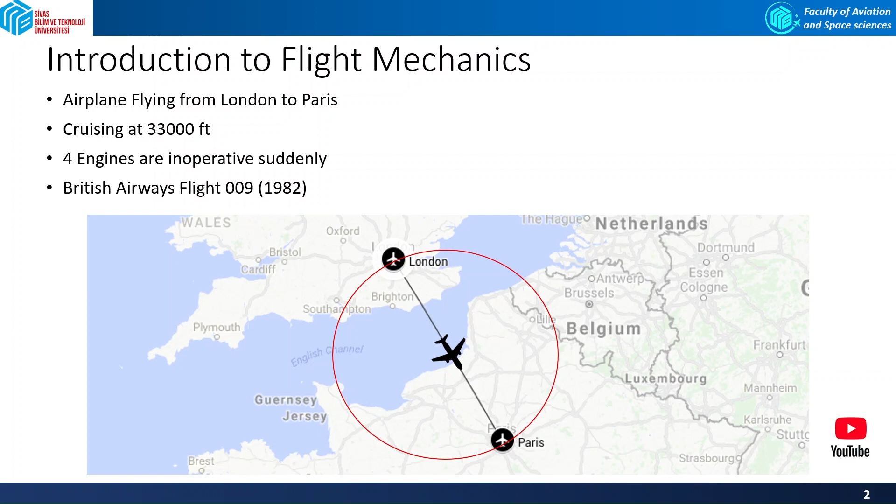Some other key questions that we can address in flight mechanics are, for example, how far can an aircraft fly with a given amount of fuel, or how long can an aircraft fly time-wise with a given amount of fuel, or what's the maximum altitude that can be achieved, or how fast can an aircraft fly, or sometimes how slow can the aircraft fly. So it's obvious that the answer to these and similar questions depends on many things, for example, the aerodynamic shape of the aircraft, the type of engines, the aircraft weight, or some other parameters.

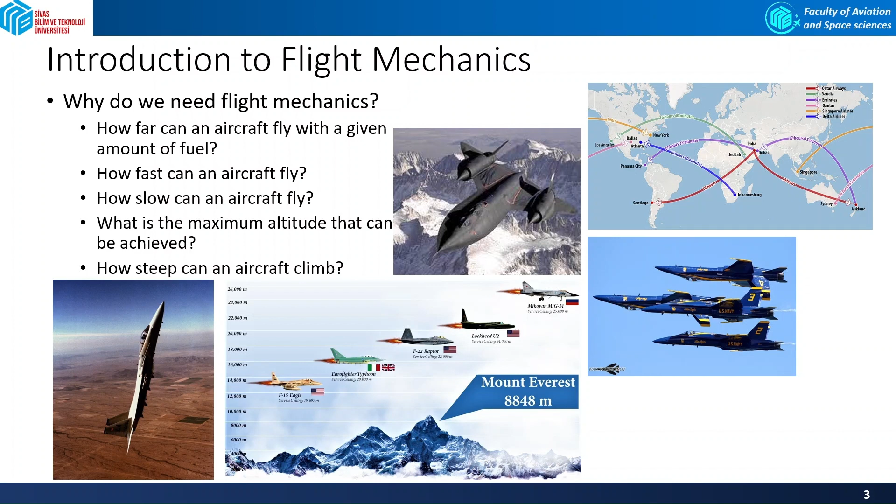So when you have the answers to these questions, you can start working on a very interesting topic, which is called aircraft morphology. Aircraft morphology means that if you want a certain performance from an aircraft, then what is the optimum shape of that aircraft. Here you can see the difference between a civil aircraft and a military aircraft. So morphology can answer this question. Because of the certain performance, the shape of the aircraft will change.

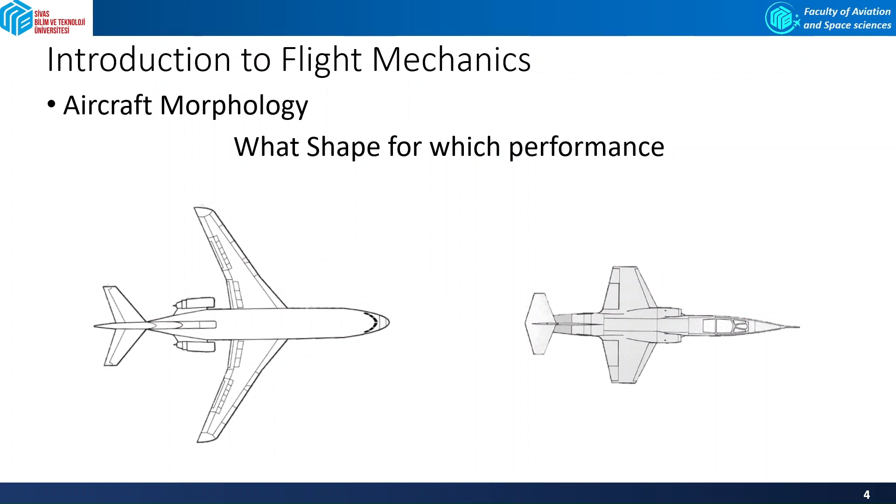Therefore, in flight mechanics, the performance of a complete aircraft is analyzed, and the question here is related to the motion of the aircraft. This means all information from the different disciplines that we just studied together, like aerodynamics, the structure, or in other words, the weight of the aircraft, the pilot, how he or she operates the aircraft, the propulsion system, and also the atmosphere, so the ambient. All the information will be gathered and given to flight mechanics.

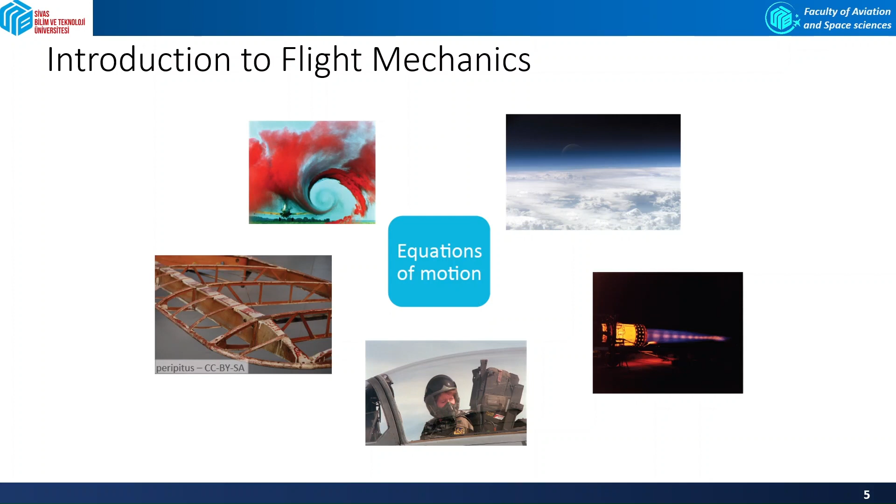So since we are interested in calculating and finding answers to those questions, like how fast or how far or how slow or how high an aircraft is able to fly, we should start by deriving the general equations of motion. So the first thing is Newton's first law, and it states that a body at rest remains at rest and a body in motion continues to move at constant velocity along a straight line unless an external force acts on it. This law, as we mentioned, only applies in an inertial frame of reference, or in other words, a frame of reference that does not accelerate.

So imagine that you are inside a train and the windows are closed and you cannot look outside. From your own point of view, everything inside the train is at rest. So this is weird. If there were a ball on the ground and the train suddenly had to brake, the ball, as you see here, starts to move forward. But there is no external force acting on the ball.

In fact, the ball just wants to continue moving forward, whereas the train is stopping. So similarly, if the train starts to turn, you can see that the ball can go left or right. Again, there is no external force that acts upon the ball, but because the train is experiencing an acceleration, the frame of reference is not an inertial frame of reference, and therefore Newton's first law does not apply to this system.

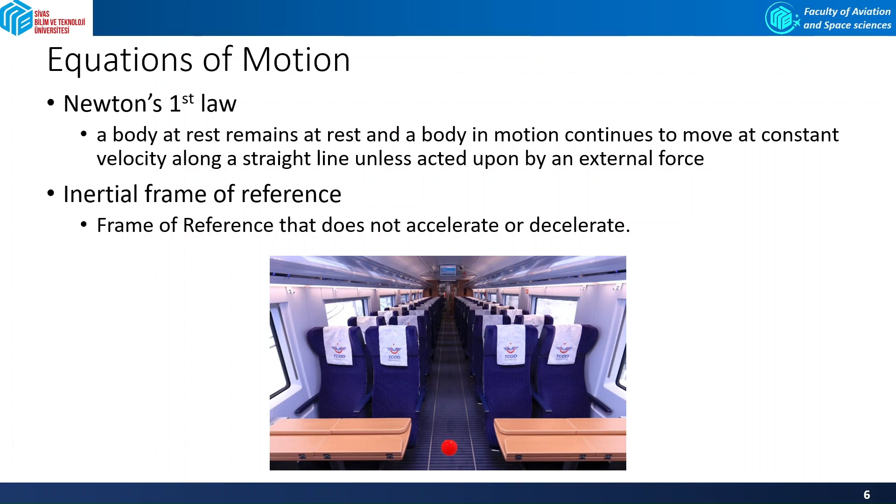This is important to realize when we derive the equations of motion for an aircraft. So we should clearly define the difference between frames of reference. So a starting point, which seems more logical to us, is the Earth surface. So we can define a reference frame which is fixed to the Earth, as you see here. This reference frame is called the Earth axis system.

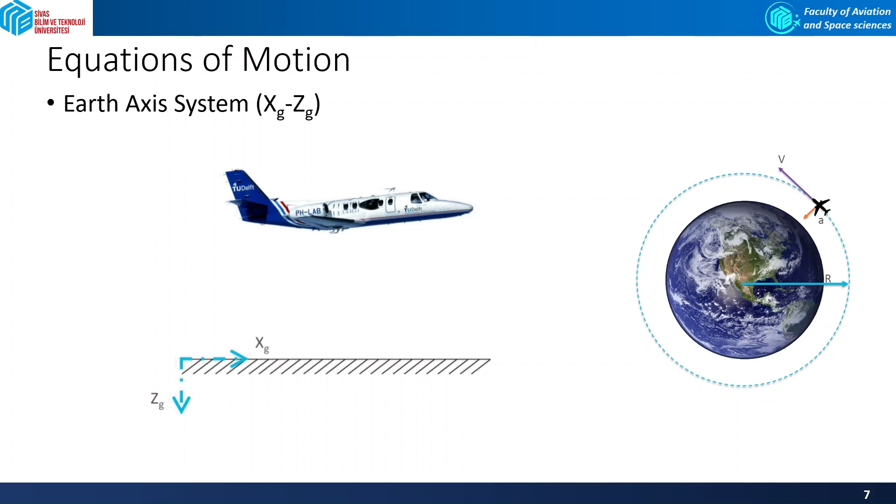Of course, we are interested in the motion of the aircraft relative to this frame, and there is this question of whether this frame of reference is an inertial frame of reference or not. Actually, we said that it is not, because if you're flying at a constant altitude above Earth's surface, you're actually moving in a circle, as you are seeing here. Therefore, an acceleration to the center of the circle, or center of Earth, is required in order to create this motion. So the frame of reference is accelerating, and it's not an inertial frame of reference for us.

As a result, there appears to be a centrifugal force which works in the outward direction, perpendicular to the circular motion. And this is not a real force, but actually it's an apparent force, just like in the train example. So the question we have right now is how large is this acceleration? From high school physics, you know that this centrifugal acceleration equals v squared over r.

If you consider the cruise altitude of most common aircraft, which is about 10 kilometers above Earth, the radius in the equation equals the radius of Earth, which is 6,371 kilometers, plus 10 kilometers of the height of the aircraft. And if you consider a typical velocity of any commercial aircraft, which is about Mach 0.8 at this altitude, equal to 250 meters per second, if you calculate, you will end up with 0.0097 meters per second squared. This is the acceleration, and this is only 0.1% of the acceleration of Earth.

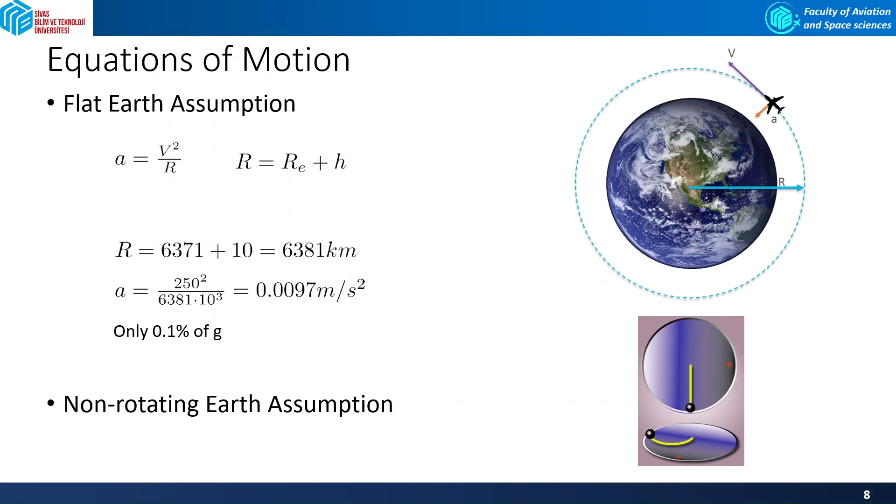There is also another important effect, which I will just mention right now, and it's due to the rotation of the Earth; we call it the Coriolis effect. You can see this Coriolis effect in the animation below. When a body is moving on a rotating frame of reference, there is always an acceleration because of this rotation. It should be noted that the acceleration related to the fact that the Earth is rotating is very small, and it can be neglected for most airplane motions. But it will be important when you consider high altitudes and high speed vehicles, when you're dealing with astronautics and orbital mechanics.

So if we assume that the Earth is flat and is not rotating, we can safely state that the Earth fixed reference frame is an inertial frame of reference. Now we can define some more useful reference frames. The forces acting on the aircraft actually depend on the orientation and the motion of the aircraft relative to the air. So for us, it would be useful to define reference frames which are attached to the aircraft, not on the ground.

We can start by defining a reference frame with the same orientation as the original Earth fixed frame, but now we attach it to the aircraft itself, and we call it the moving Earth axis system. Here it is shown by X_E and Z_E. So it's nothing but the Earth axis system, but attached to the aircraft. We call it the moving Earth axis system. And here the nose of the aircraft is actually pointing in a different direction, as you can see. And you can also attach an axis system fixed to the aircraft body and call it the body axis system.

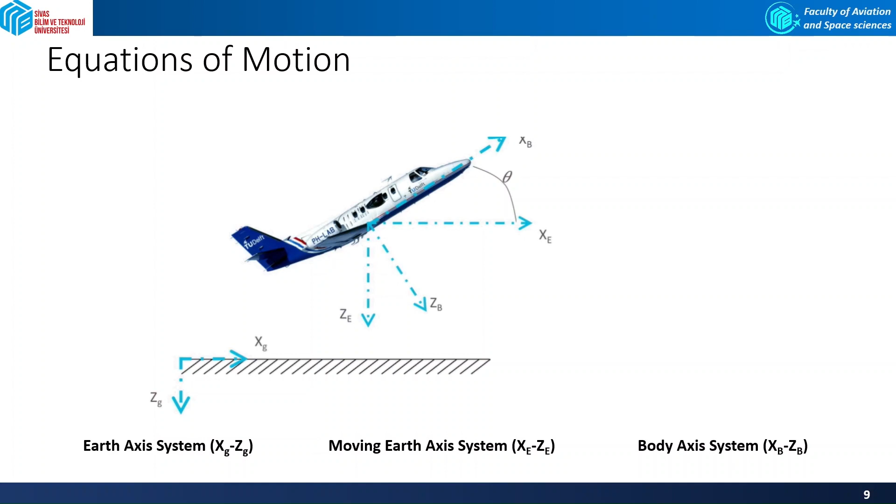So, summarizing, we have a reference frame from the point of view of the aircraft attitude, and we have two frames relative to the Earth: the Earth axis system and the moving Earth axis system, and then the aircraft itself has the body axis system. But since we are interested in motion of the aircraft, there is one final element of interest, and that is the direction of the airspeed vector.

In most cases, the nose of the aircraft has a slight angle with respect to the airflow in order to generate the appropriate amount of lift, and unfortunately aerodynamic drag is there as well. So the angle of the airspeed vector with respect to the horizon we call the flight path angle, and the reference system attached to the airspeed vector is called the air path axis system.

Now we have the reference frames defined, and we can start working on Newton's second law. If we can define all forces acting on the aircraft, then we can calculate the acceleration and thereby the motion of the aircraft. So let's identify which forces act on the aircraft. Of course, there is the gravitational force, W. This is the weight, and this force acts on the aircraft and points to the center of the Earth. So it can be drawn along the z-axis of the moving Earth axis system.

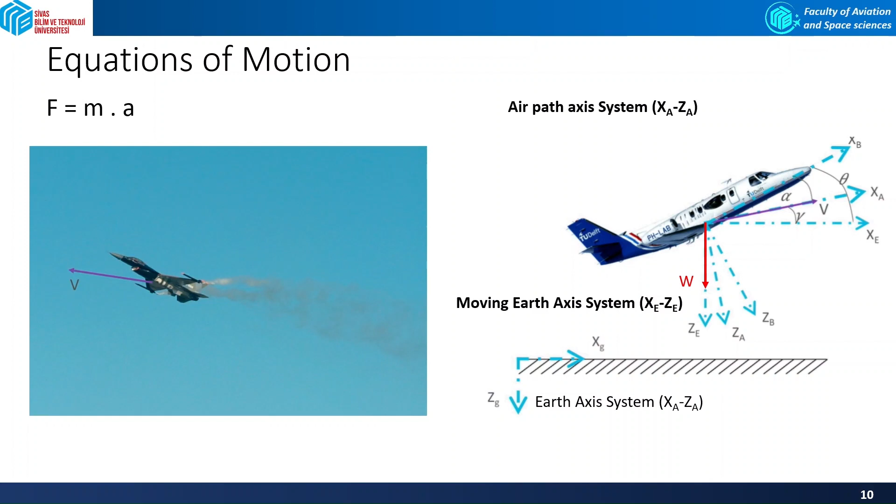This gravitational force is a function of the distance to the center of the Earth, and the variation is measurable but very small. So for our applications of aircraft flying below 80 kilometers altitude, we can neglect this effect and assume that the gravitational acceleration is in fact constant.

Now, if you draw the aerodynamic forces, the lift and drag, by definition the lift force is always perpendicular to the airspeed vector, and the drag is parallel to the airspeed vector v. Therefore, they are both defined in the air path axis system.

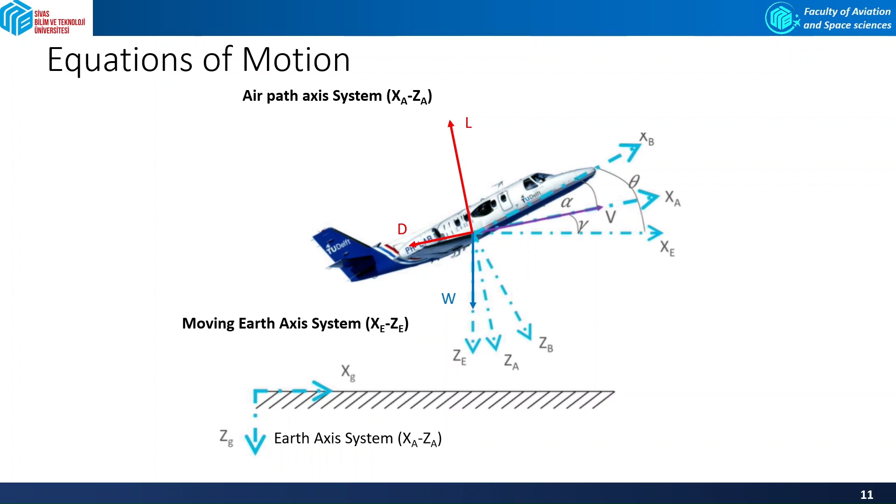And the final force acting on the aircraft is the thrust force. The thrust comes from the propulsion system, and the direction of this force depends on how the propulsion system is positioned relative to the airframe. So if you draw it in a general direction, you can see it has an angle with respect to the airspeed vector, and you can call it the thrust angle of attack, alpha t. So now you have defined all forces acting on the aircraft, and you can have a look at the accelerations.

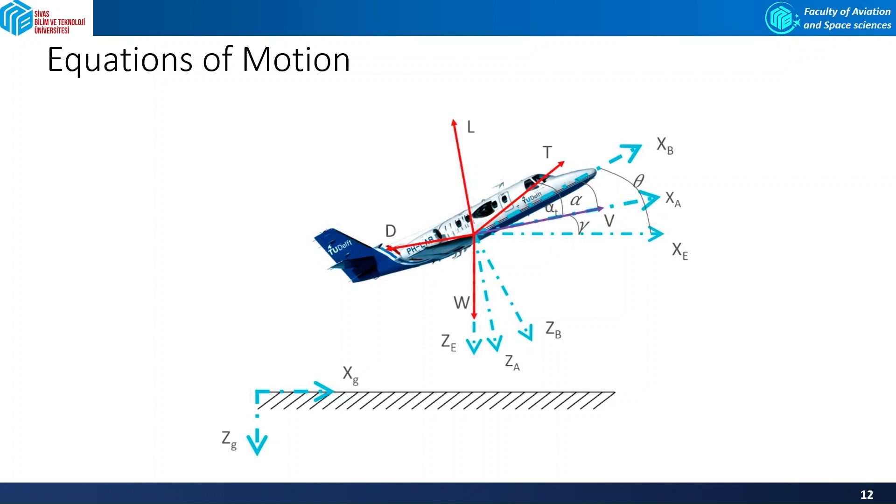So what are the accelerations? Since we are looking at two-dimensional motion of the aircraft, the acceleration vector can be defined by two components. In principle, we are free to choose in which axis system we define the accelerations, but experience has shown us that defining them in the air path axis system is the most convenient way.

If the aircraft has a forward acceleration along the x-axis of the air path axis system, it will change the magnitude of the airspeed vector. So the acceleration can be described as dV/dt, the change of velocity with time. So we are talking about the acceleration along V, along the velocity, or along the xa air path axis system.

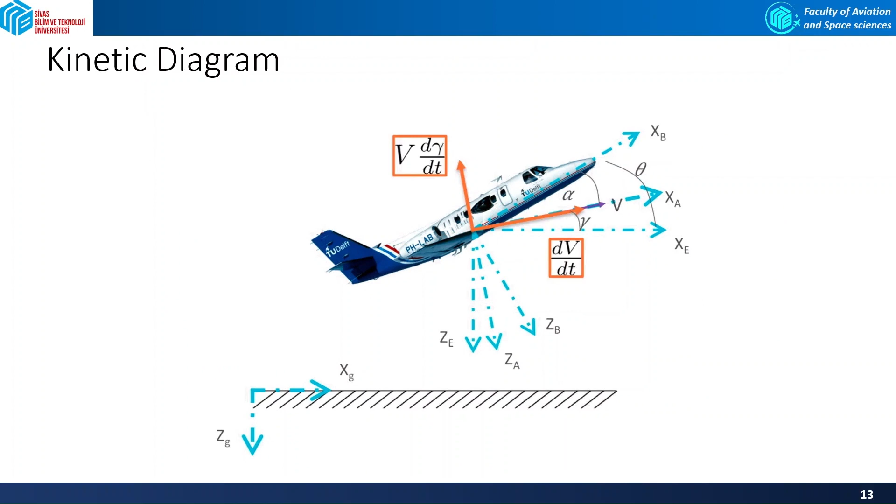Therefore, you can observe that the velocity v can also be written as d gamma dt times r. So v squared over r, which is the centripetal acceleration, can be written equal to v times d gamma dt. So we basically replace one of the v's in equation 1. We can write it v times v over r, and v over r can be written as d gamma over dt. So the final result gives you the acceleration also equal to v times d/dt of flight path angle.

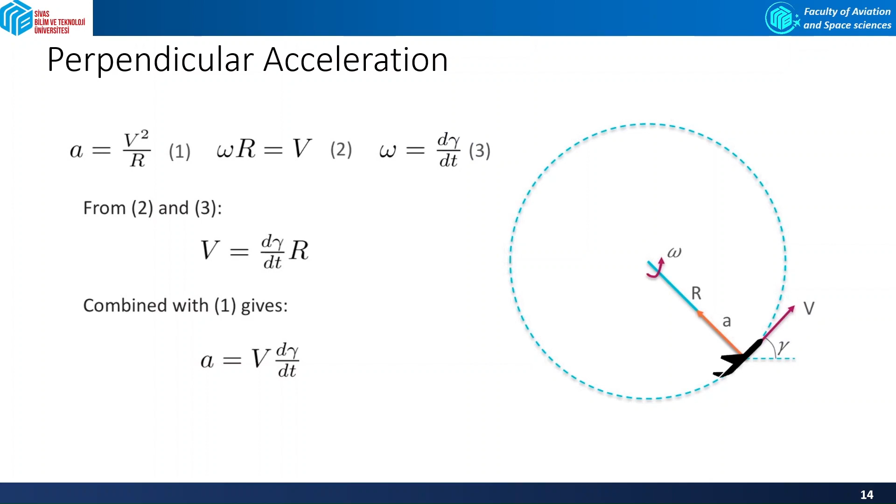So this is a nice form, because the equation of motion of the aircraft is purely defined by gamma and v, and these are the only variables in the acceleration vector. So based on the forces and the accelerations, the point mass equation of motion can be written down, and it is most convenient to express them parallel and perpendicular to the airspeed vector, as we said. And these equations, when you write them, will form the basis for your aircraft performance calculations.

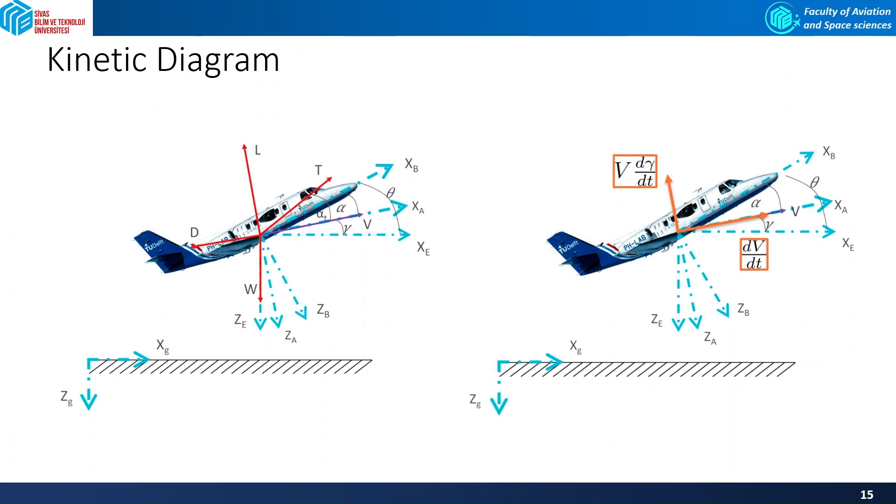So when you write those equations along v and perpendicular to v, you will come up with these two formulas, and I'll leave this as an exercise for you. So please work on this, and considering these two free body diagram and the kinetic diagram of aircraft in 2 dimensions, please derive the above equations as your exercise for this session.

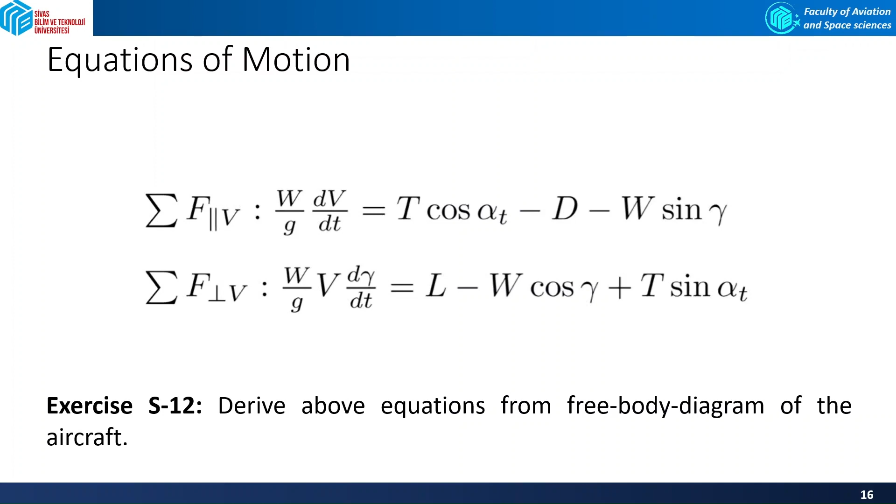So as you know, we wanted to answer some questions like how far this aircraft can go with some given amount of fuel, or how fast or how slow it can go, or what's the maximum altitude that the aircraft can achieve, or how steep one aircraft can climb. So basically you have these 2 equations with many unknowns. That's typically something that cannot be solved, 2 equations and too many unknowns. But if you look very closely to these 2 equations, there are actually 3 different types of variables you can find in these 2 equations.

So the first one is the time. So you can call the time the independent variable. So during the flight, all the variables will change as a function of time, and you cannot influence it. The pilot cannot influence it. It will keep running no matter what you do. Time goes by.